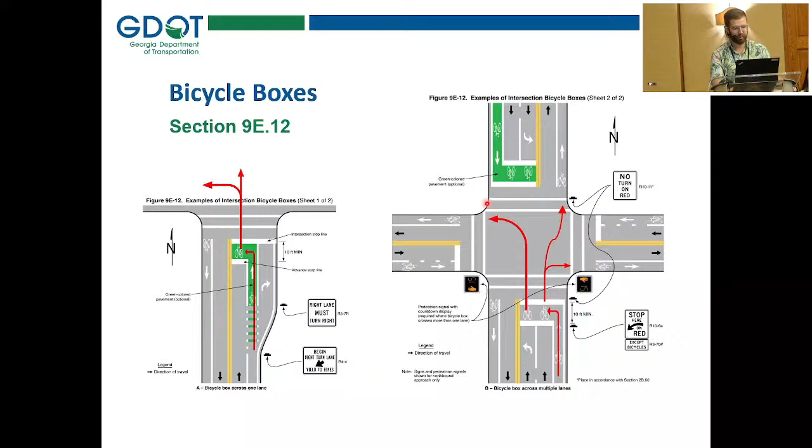Till the main line gets to green, and then they can either go through or turn left. And then same thing you can see here on the right, some more idea when the bike box goes across multiple lanes. They come up here, they wait for the red, and then they can either go through or they can get in front of the left turn lane and turn left. So that's how these work if you've seen them before.

The main purpose of these is that it is a safety measure to mitigate right hook versus bike conflicts. So what can happen if you don't have one of these is, say in this example in the top right, when the main line gets to green, both the bike and the vehicle can proceed. If this vehicle is trying to make a right turn, it allows for bikes to get in front of the vehicle while it's red, and then they go first in front of the vehicle, which eliminates that conflict.

And also, it's this big green bike box that helps make bikes more visible at the intersection and allows them to get in front of the cars, which makes it safer. One thing to note is that these can be used to facilitate left turns. So if you have the bike box extending in front of the left turn lane, like you can see here in the bottom right. However, this is not mentioned in the MUTCD. The MUTCD just talks about mitigating right hook conflicts.

And the reason being is that this is not the preferred way to provide left turns for bicyclists. It works, but it's very awkward for cyclists, especially if the bike box goes across multiple lanes. It's awkward for cyclists to kind of scoot across multiple lanes to get over here to the left turn lane. And also, if the light is green when they arrive, this doesn't work because they can't get into the bike box while it's green because vehicles are coming. So they have to sit and wait in the bike lane, blocking that bike lane for any bikes who want to go through.

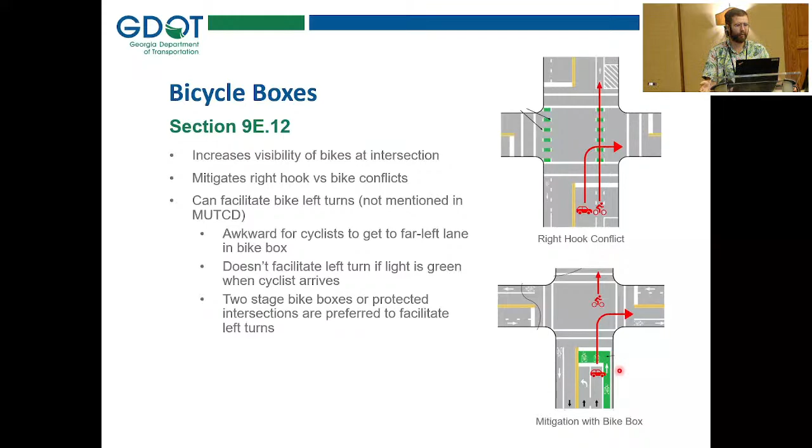So because of this, where possible, it's better to provide either a two-stage bike box or a protected intersection to facilitate those lefts. But in some cases, this isn't feasible, and the regular bike box is the only way to facilitate those left turns. So to go into some of the standards for this, again, I can't cover everything today, but these need to be minimum 10 feet long with at least one bike symbol in them, but it can have multiple.

If the stop bar is relocated when you install the bike box, or there's not one there, then you install it and push the stop bar back. You have to reevaluate the yellow change and red clearance intervals, just to make sure that you're accounting for the extra time the vehicle needs to get through the intersection because you pushed the stop bar back.

And then also, if you have a bike box across multiple lanes, you need to make sure that you're providing these pedestrian countdown heads so that if a bike arrives when the signal is red, they know they have enough time to get over to the left turn lane. If it's red but about to turn green, they don't want to be halfway through and then the light turns green and then they're stuck.

And then lastly, similar to a lot of the other things I've talked about, right on red shall be prohibited for the lane with the bike box. So this right would have a no right on red. Again, when there are bikes waiting in the bike box, you don't want people trying to turn right on red and hitting them while they're waiting in the bike box.

And then lastly, this is just guidance. It's not a standard, but the guidance is that a bike lane should be used on the approach to a bike box. This is so that bikes can actually get to the bike box when there's traffic queuing at the intersection. Otherwise, they're just stuck waiting behind the vehicles, and the bike box doesn't do you a lot of good.

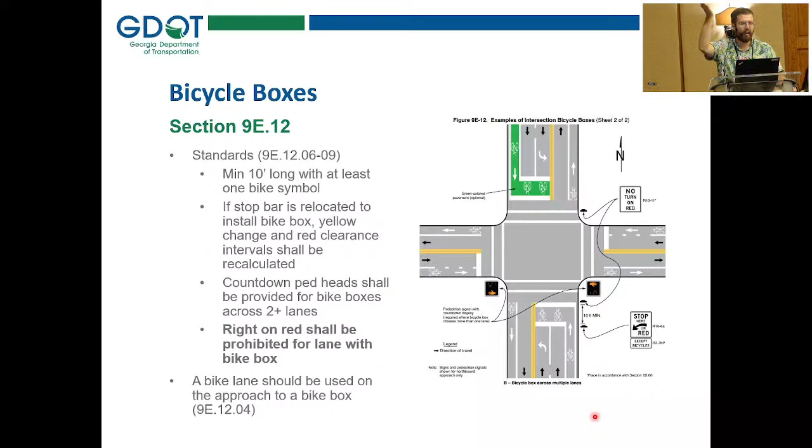So this is an example from our Memorial Drive project. Again, wish I had photos to actually show it in the field, but this is the plan for it. You can see two examples here. This one on the top is a bike box on the side street. So you can see this is one way of, if you don't have a bike lane on the road where you're trying to put one, but there's bike traffic on it. You can see that we have sharrows on this road, for instance. You can develop a bike lane like this approaching the bike box, and that allows for bikes to use it.

And then you can also see here on the right an example. So this is a case where we didn't have room to do the two-stage bike box. And also because of just the weird configuration of this intersection, it wouldn't have worked. So this is the case where we wanted to facilitate this left because this street is a bike corridor. So we did use a bike box here to facilitate that left turn, even if it's not ideal.

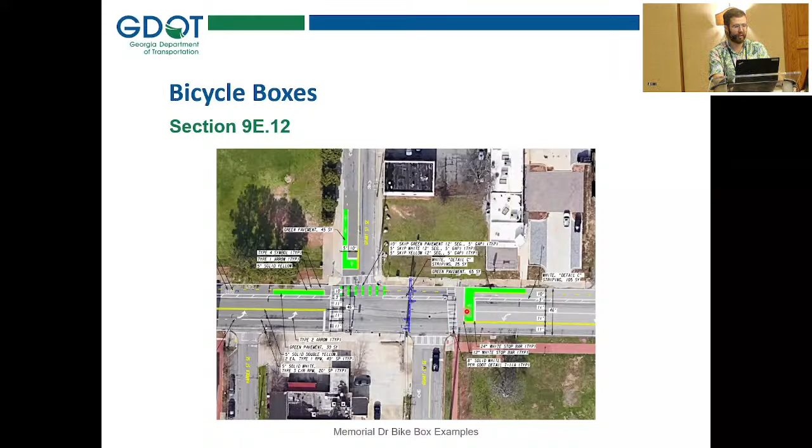So next up, I want to get into one of the more complicated things that were added, bicycle signals. So these are traffic signals, but they have a bike signal in them. So you can see in the top right what these look like. So these shall only be used for designated bicycle facilities. And the big one on this is that they shall only be used with a protected bicycle phase.

So this means that when you have a bike signal, you have to prohibit, when that phase is green, the right turns and the left turns across the bike facility. So it has to be a protected phase with nothing conflicting with it. And also, just a note, these shall not be used with hybrid beacons, so you can't put these on a PHB. And then one thing I love that they included is that the signal indications can be your standard 12-inch. You can also have smaller ones that are either 4 or 8 inches.

So I wanted to show here on the bottom right, this is an example from Seattle, but you can see they have these little baby bike signals, these little ones you put on the near side for bikes so they can see the signal indication. These are little 4-inch ones, and you can see down on the far side, they have the full-size one. And then also you can see, kind of hard to see, but there's a no turn on red here, and then this is a red arrow to make sure to prohibit that right turn. And there's something similar for the left turn to prohibit that when the phase is green.

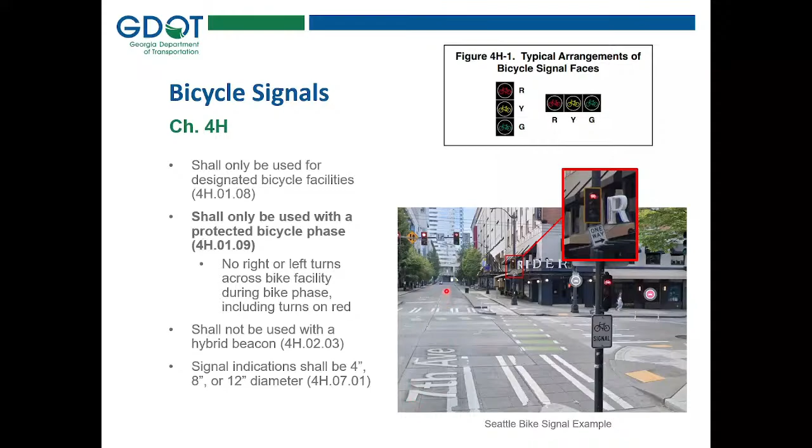So for this reason, obviously you don't have to use bike signals. You can just use regular signals and not provide the protected bike phase. But it is GDOT preference to provide a protected bike phase specifically for these two-way facilities to mitigate that contraflow left hook conflict. And then one of the big concerns with this, of course, is the vehicular impact of it. If we're doing this protected bike phase, that may impact your vehicular operations because you're having to prohibit those turning movements. But one of the ways to mitigate this is you can use bike detection to actuate the bike phase. So it's only being called when there's actually a bike there, and that really helps mitigate some of those impacts.

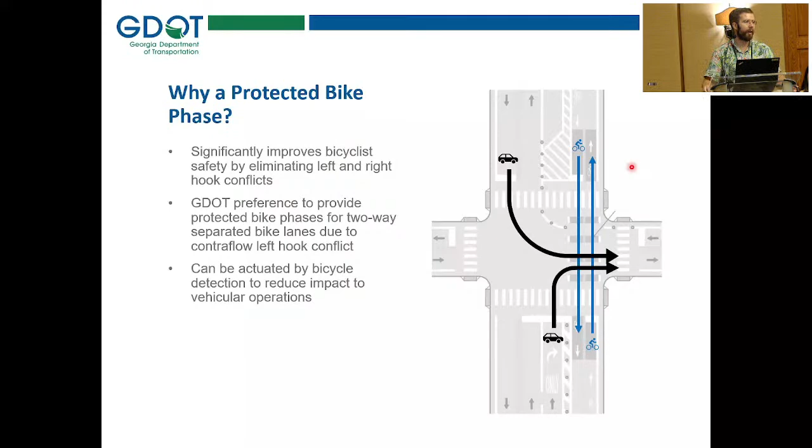So lastly, I just wanted to provide some examples of how to accommodate these protected bike phases. So these aren't in the MUTCD. These are, again, from that draft update to the AASHTO Bike Guide, but I think they're really helpful, so I wanted to share. Two ways of doing it is you can have either an exclusive or a protected bike phase.

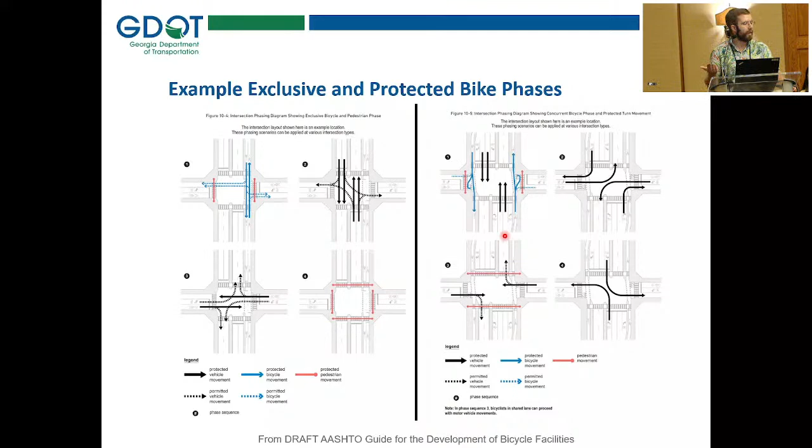But the challenge then becomes prohibiting those turning movements. So you can see in the example here, they're assuming that you have a right turn lane and a left turn lane here. But if you don't have those turn lanes, it gets more difficult to provide this protected bike phase.

So I wanted to provide an example of how we did it on Memorial. So on Memorial, and this is a common case when you're doing these roadway reconfiguration projects, we have left turn lanes, but we don't have right turn lanes. It's just a through lane and a left turn lane at most of the intersections. So we have a protected bike phase because we do have that two-way facility on Memorial. Our phase 9 is triggered by bike detection, so it will only be called when a bike is actually there.

And during this phase 9, the bikes get the green with the bike signal, so they can go in both directions. And then the eastbound vehicles can go through, and all other vehicular movements are prohibited. The reason we don't allow for the westbound through is because since we don't have a right turn lane, there's no way for us to prohibit that right. If we did, someone waiting to make the right would just block the through lane, and then people would get upset when the light is green because they're trying to make that right.

So we just go ahead and prohibit that westbound through, and then we have no turn on red to make sure that people can't make that right turn on red and conflict with the cycle track. But we don't have this problem with the eastbound through, so we can at least run that concurrent with the bike facility to have the minimal vehicular impacts while still maintaining that protected phase. And also, because we have this bike box here, we also have no turn on red for the southbound vehicles as well.

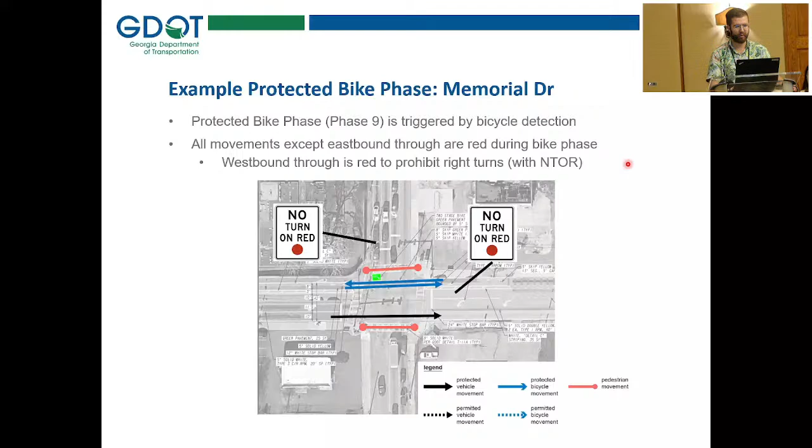So this is what it looks like when you bring all these pieces together at an intersection, how we actually make it work. There are different ways to do it, but this is what worked for us on Memorial. So that's all I had for y'all for today.

So to sum it up, the new MUTCD has a lot of new elements that you can use to improve bicyclist safety and bike connectivity. So some of these are for safety. You can use green pavement to make bike lanes more conspicuous. You can install separated bike lanes that provide vertical separation between bikes and the vehicular lanes. You can use bike boxes to mitigate the right hook conflicts.

You can use bike signals to clearly indicate when bikes can go through the intersection and also provide that protected bike phase, to eliminate those right hook and left hook conflicts. And lastly, you need to use no turn on red for many of these elements to eliminate that right hook conflict. And there are also elements to improve bike connectivity, specifically to allow for left turns. That's largely what the two-stage bike boxes are for.

And then also, I didn't have time to cover it today, but there's been an overhaul to bike signage as well. So I highly encourage you to check that out as well.

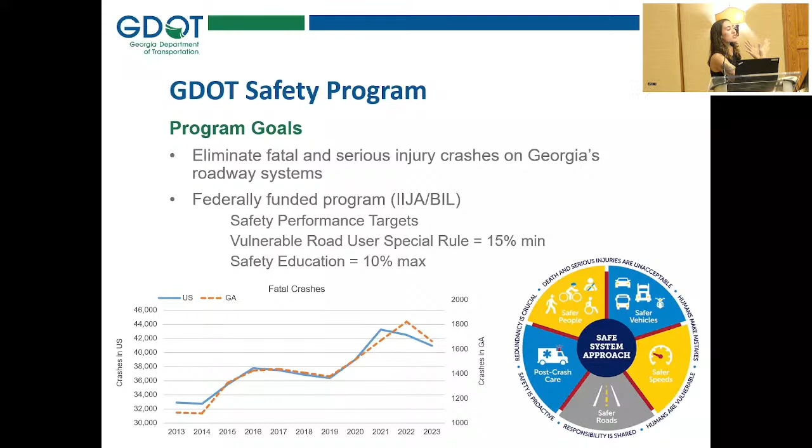And so another initiative that FHWA came out with is something called the Safe System Approach. And that's really driving in that safety is proactive. Humans are vulnerable, they make mistakes, and we really need this kind of layered approach. They call it the Swiss cheese model. But the idea is if you can layer up your Swiss cheese correctly, right? Because it has holes, no one's perfect. But if you can layer them correctly, your holes won't be overlapping, so you have a full layer of protection, essentially.

So how am I, as a program manager, supposed to identify the best countermeasure to mitigate all of these issues that are so spread out over space and time? And that's how we really developed this systemic approach. And so we use data to develop a standard for the state. And that way it helps driver expectancy as well as allows us to install low-cost countermeasures that are a lot more proactive.

Some initiatives that our program has put out already are rumble strips, both centerline and edgeline, and cable barriers. I think we have systemic all-way stop improvements as well, like transverse rumble strips on the approach to the all-way stop. And we're also looking at potentially installing all-way stops at low volume intersections, something that North Carolina came out with. So very excited to start piloting that.

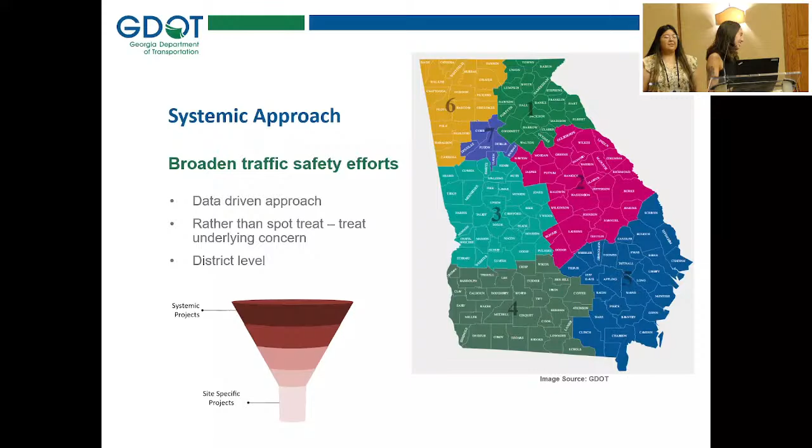Good morning. Please bear with me. I've had a little too much fun lately, so you might see me reach for the tissues or cough occasionally.

Phase 1 includes our data collection. We are looking at risk factors such as traffic volumes, truck percentage, roadway geometry, which includes the presence of a median, if it's undivided or divided, number of lanes, and presence of a horizontal or vertical curve. We are also looking at vehicle speeds and differentials. We're taking a look at the 85th percentile.

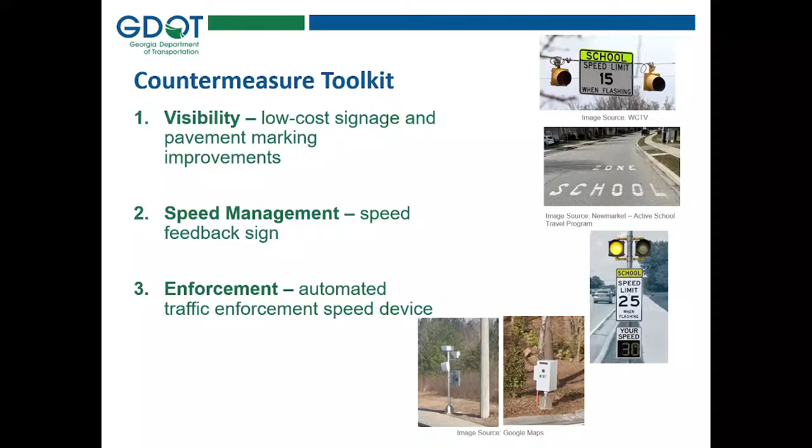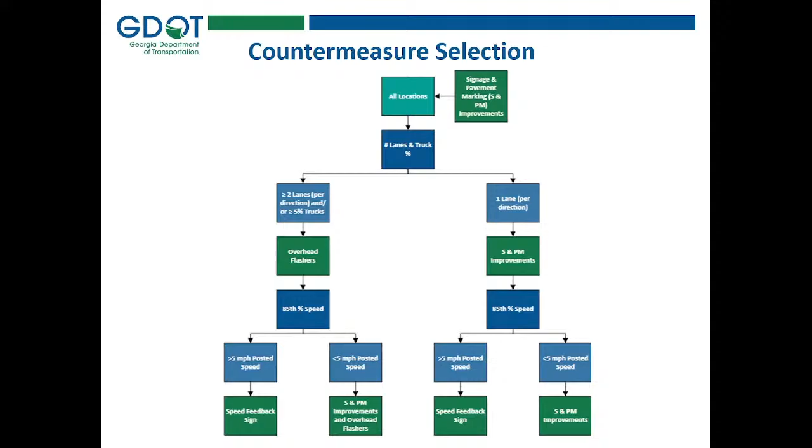This is our decision tree for our countermeasure selection. It might be a little hard to see, so we'll run through an example together. We are taking a look at all locations on state routes, and regardless of the prioritization score they receive, they will all be evaluated, and based off of the typical section, if they do not have adequate signage, then we will upgrade or install more signage or pavement markings.

We are looking at number of lanes and truck percentage. If we notice that they have a high truck percentage and/or 2 or more lanes per direction, then we are recommending the overhead flashers to target that visibility.

And we are then taking a look at the 85th percentile, and if we notice they are traveling 5 miles per hour above the school zone speed, then we are recommending the speed feedback sign. And that's for one example. But just because a school has, let's say, an 85th percentile 5 miles above, doesn't necessarily mean they will have overhead flashers. It just depends on what is the existing and what can we do to address those 3 points that I mentioned earlier, which is visibility, speed management, and enforcement.

So currently we do not have the typicals yet. We're not at that stage, but we are preparing to get those completed. But we are basing the typicals off of the newest MUTCD, the 11th edition, part 7. I've included an image of all the signage and the combinations of signage that you must include in a school zone or outside of a school zone.

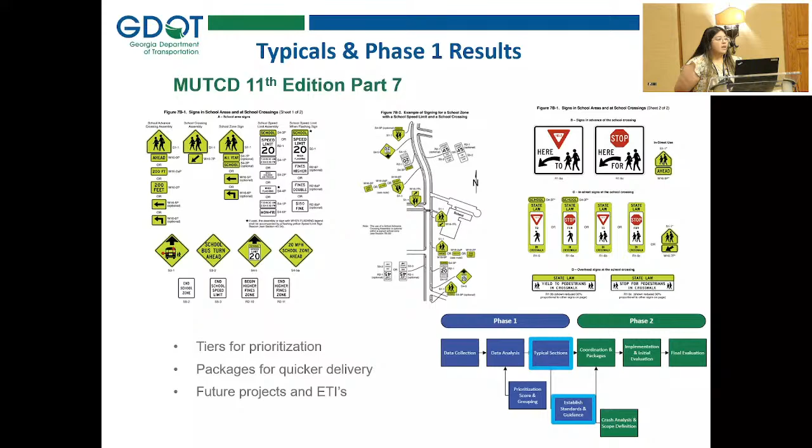So we are taking a look at if there is a presence of a crosswalk somewhere in that school zone and the nearest traffic signal. We are also taking a look at pedestrian crashes. So based off of all this data, if we see a need for any type of pedestrian project, we have the data to do some type of pedestrian accommodation projects, or if we see that an intersection or a segment needs some type of traffic operation improvement, then we have all the data to proceed to that being addressed also.

So moving on to phase 2. Next would be our implementation and initial evaluation. So let's say we have the typicals. So now we're passing this off with the districts and coordinating with districts and local governments. And we're seeing if, with these upgrades and improvements, we are noticing any type of change with the 85th percentile, or any type of trend with crashes, or seeing if these recommendations are actually working per se.

And like I mentioned, the automated speed enforcement device is part of our last recommendation, just because of the process that it undergoes to get that actually implemented. And it's still relatively new. So in 2019, House Bill 978 was signed, and as a result, GDOT policy 672-20 was created. We currently have a research project with Kennesaw State University, which is taking a look at the effectiveness of these speed devices and creating a guidance for continuous usage in Georgia.

So the results of this research may affect our policy with the implementation of these devices and also the physical placement of the device itself. And I believe we won't know the results until 2026. I'm correct. So last but not least, we have our final evaluation. We take a look at the crash data and see if perhaps we can do a crash modification factor with the typicals that we created.

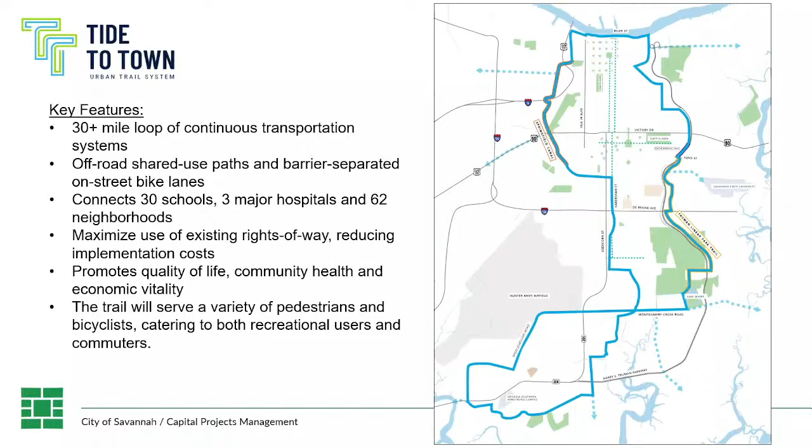This is an overview of the phases, and then we'll go into detail of each phase. Police Memorial Trail was the first phase that we're also calling Truman Trail Phase 1. That phase is complete and in use. Truman Trail Phase 2A is also complete. Truman Trail Phase 2B is under construction. And then we have the Middle Ground Road phase. We're starting design this year. And the next phase, the Montgomery Crossroad phase, is in planning.

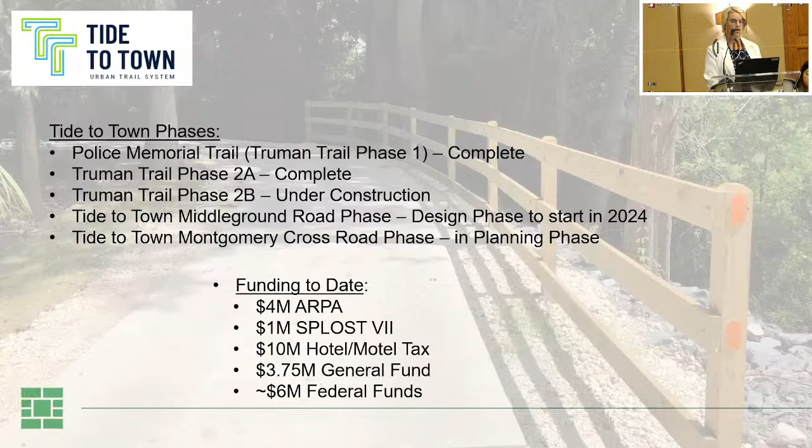To date, we've gotten a lot of support and funding for the project. There's a lot of positive momentum in the Savannah area. We got $4 million in ARPA funds, the relief funds after COVID, $1 million in SPLOST 7, $10 million from hotel motel tax. That was just approved last year. $3.75 million in funding from the general fund from the city of Savannah, and also about $6 million in federal funds.

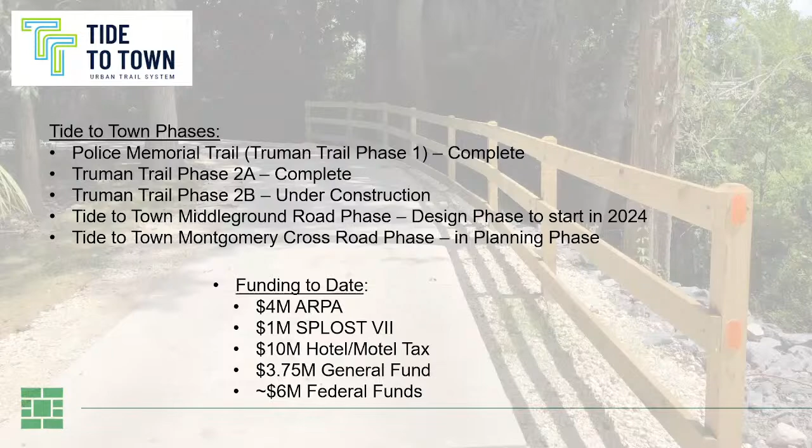So Truman Linear Park Trail is really what started and became Tide to Town. As I mentioned, the Police Memorial Trail was the first trail built. So if this blue line is going to ultimately be Tide to Town, the Police Memorial Trail is on this side of the city here. I don't know how familiar you guys are with Savannah, but it connects Daffin Park, which is on Victory Drive, to 52nd Street.

And then Phase 2A has already been constructed and is in use, and it connects DeRenne Avenue down to Lake Mayer. And then 2B connects these two pieces, and we just had the groundbreaking to start construction for that piece.

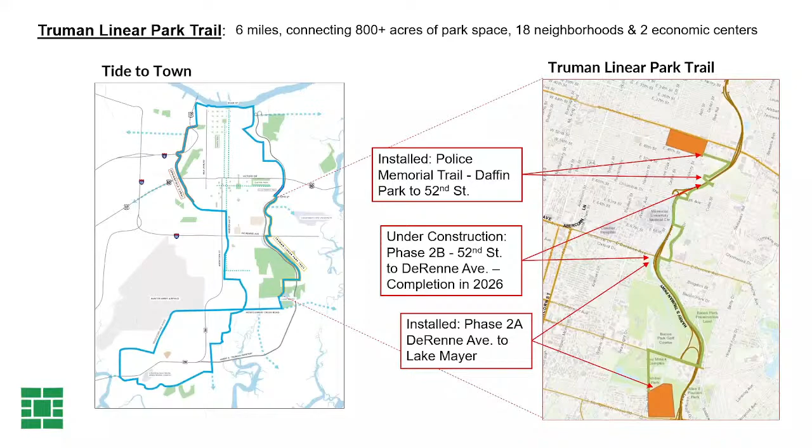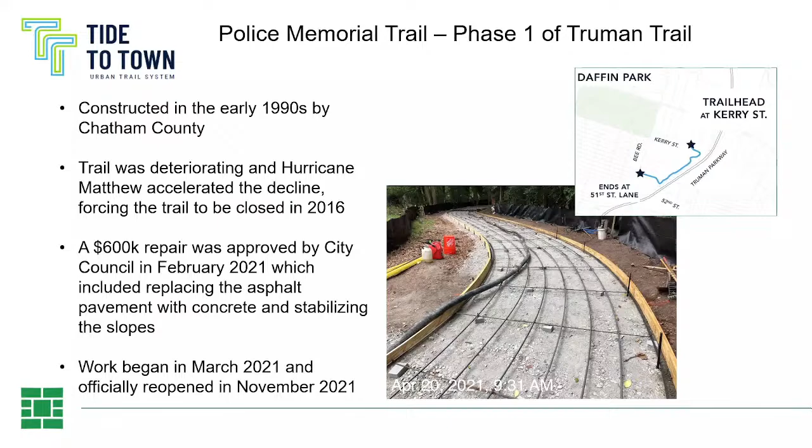So the Police Memorial Trail was constructed in the early 1990s by Chatham County. It was deteriorating. It runs along a canal there, and it was kind of falling into the canal, and then Hurricane Matthew accelerated the decline. And we had to close the trail in 2016. So a $600,000 repair was approved in February '21, which included replacing the asphalt pavement with concrete and stabilizing the slopes. And we did that work in '21 and reopened the trail in late '21. This is a picture of just the construction of that repair.

Phase 2A was a collaboration between Chatham County and the city of Savannah. We reached an initial agreement in 2014. It's about 3.1 miles of 10-foot wide multi-use trail and includes two bridges over the Casey Canal. Construction was managed by the county and began in 2019. It was $6 million in SPLOST funds, and it opened in late 2020. And then the city took over maintenance and operation of the trail.

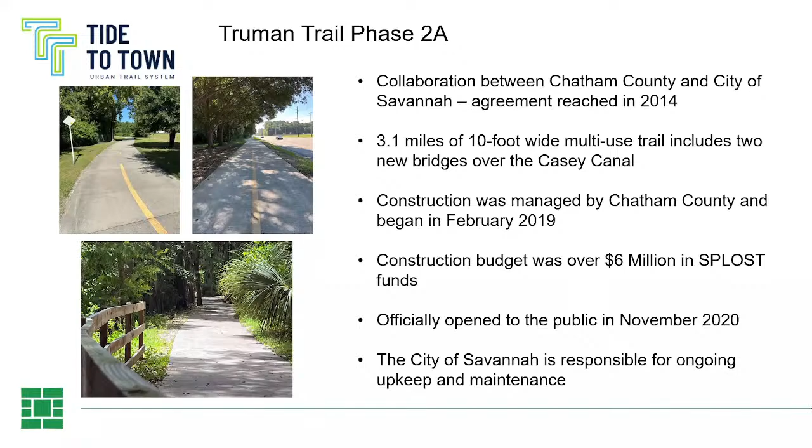Well, Truman 2B, he's kind of been around a while, but we have finally got him started. And when I started work in November, I named all my trails. And Truman 2B, he's a bad boy. And he's so bad that I've had him in timeout. And I finally told him, okay, you're doing better, and we're going to start you in construction, but you got to be good.

So, Truman 2B, he's going to connect Police Memorial Trail and 2A. I don't know if any of y'all are familiar with Savannah, but it's going to start at DeRenne at Jenkins, and then it's going to run up to 52nd Street Bridge, and you're going to cross over, and then it's going to connect you into the Daffin Park area. So it's really going to be the link that's going to connect and give you a nice long trail to walk on or bike.

It's going to be 1.8 miles of trail. It's going to be 10-foot concrete shared use path, just like 2A. There'll be timber bridge ditch crossings, and then we've got the shared use path across the 52nd Street Bridge.

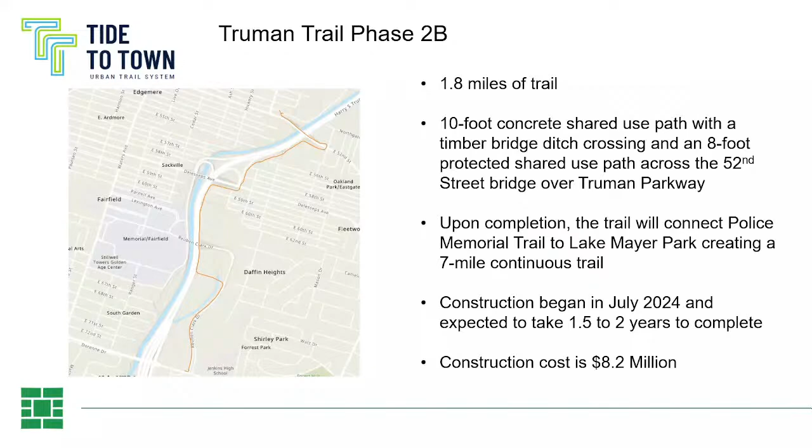As I said before, it'll connect Police Memorial to Lake Mayer. We had the groundbreaking July 1st, and that was kind of a well-supported, fun event just because everyone's excited about it. We expect it to take about 1.5 to 2 years. Our contractor that we have under contract to construct is JHC out of South Atlanta. I'm looking forward to getting them started. Construction cost, $8.2 million. And let's see, where do we go next?

The next phases that we're kind of looking at are Middle Ground Road and Montgomery Cross Road. The next one that has a PI and associated funds is Middle Ground Road. It's basically going to connect 204 to 204. It's going to be kind of a loop around that. It's going to connect Georgia Southern to Abercorn at Montgomery Crossroads.

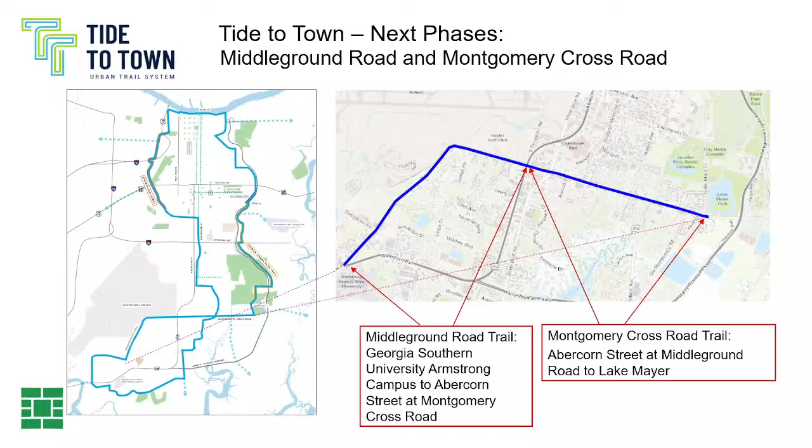And then the next phase, we're in the very early stages of planning and looking at, is taking Montgomery Crossroad, kind of like what y'all are going to do with Memorial. And hopefully we'll get to talk later about that, of taking Montgomery Crossroads and putting some paths, kind of like what he was talking about earlier. So lots of things to come in that.

In particular, the Middle Ground Road phase is 2.9 miles of proposed trail. As you can see from the map, we've got one side that's highly dense with commercial and housing, and the other side is Hunter Army Airfield. So it's going to make a good connection to get people on pavement that could serve that area well. That project includes $880,000 of TAP funds, Transportation Alternatives Program.

And we're currently in design negotiations with a design firm. That's a fun process to go through. It's always something new. We hope to begin design in September. And I'll turn it back over to Christy.

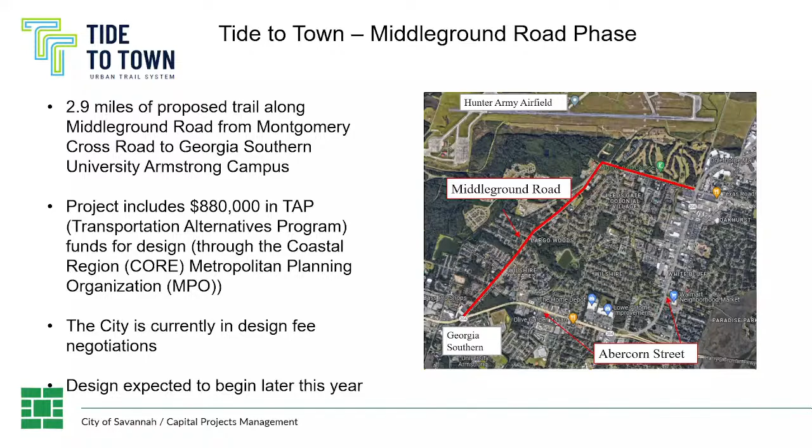All right, so the Montgomery Crossroad phase would connect the Middle Ground phase that Tina was just talking about, that we're about to kick off design on, back to Lake Mayer. So it'll make it continuous, taking you from south of downtown on Victory Drive all the way south to Georgia Southern Armstrong campus. So that'll be a great connection once we get that done.

But we're doing a corridor study and a traffic study of Montgomery Crossroad. It's currently 5 lanes with the suicide lane in the middle, to see if we can support a road diet. Really, on both sides, we would look at putting a protected trail on both sides of Montgomery Crossroads. So we're hoping that we can do it all within existing right-of-way and execute this project, hopefully with local funds, so we can get it executed quicker.

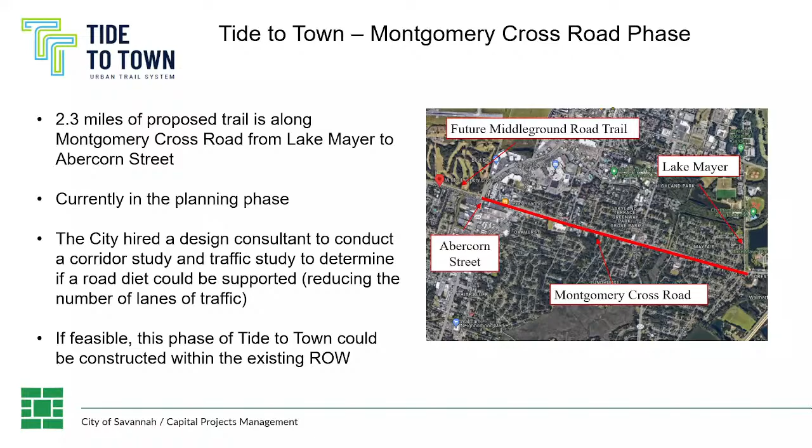And then we know how important it is to look at how this will be impacting the community. And so we actually put out an RFP and are now under contract. We called it Equitable Growth, Enhanced Community Engagement, and Project Phase Development. We wanted to ensure the project reflects resident input, is managed in coordinated phases, and promotes equitable growth by prioritizing generational wealth building and allowing existing businesses and residents to stay in place. So we're trying to avoid forced displacement and gentrification.

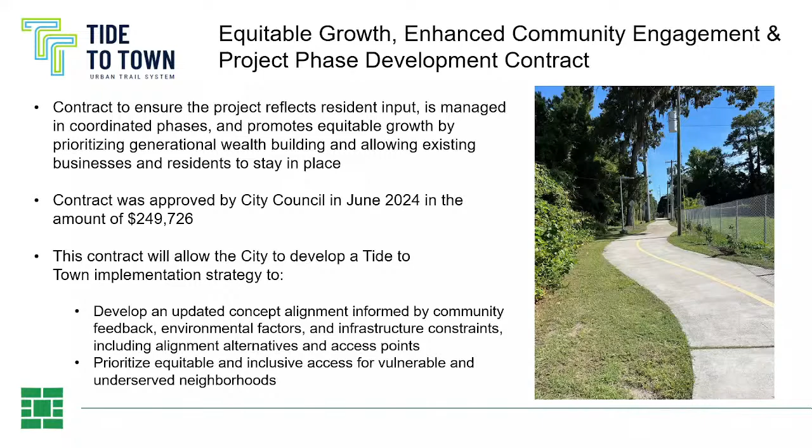This contract was approved by City Council in June of '24, just last month, in the amount of just under $250,000. And it will allow the city to develop a Tide to Town implementation strategy that will develop an updated concept alignment informed by community feedback, environmental factors, and infrastructure constraints, including alignment alternatives and access points, and also prioritize equitable and inclusive access for vulnerable and underserved neighborhoods. And that's really all we have for Tide to Town.